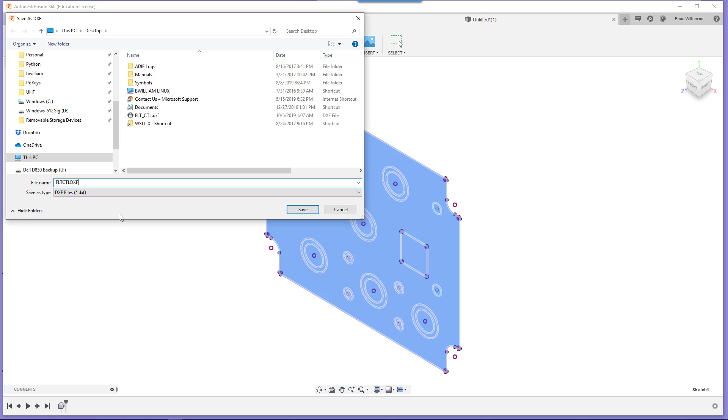However, what we want to do is save this as a DXF file that we're going to import and then start modification. So we go here and save as DXF, and I'm going to call this something like flight control DXF. We're saving it as DXF, and I'm putting this on my desktop.

At this point, we're done here. We can come out of this. We're going to create a sketch. Create sketch, and I want to put it on this plane.

Now that we're looking at it, the idea is we do insert DXF. We have to select the file, and this has basically got everything that we took out of Martin's diagram there into 2 dimensions, and there it is.

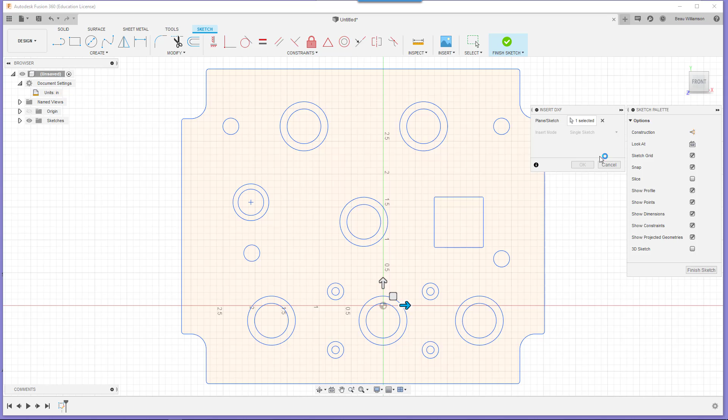And there we go. Okay, now we've got the sketch that's basically imported from the DXF file that we created from Martin's stuff. Now, one of the things that we need to do is create some other things in our sketch here. So we can go in, tell it to edit sketch.

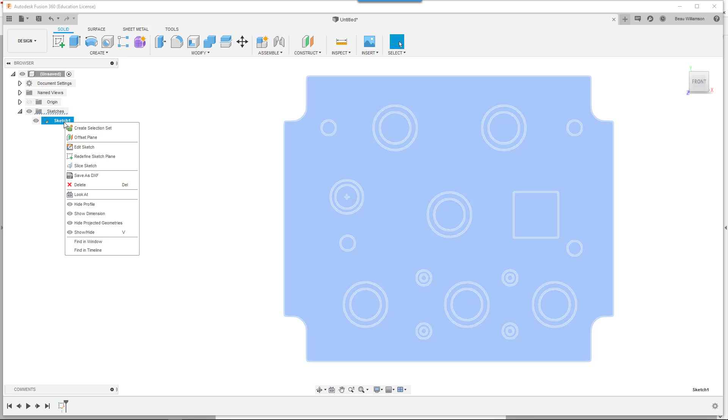So the best way to do that, let's go over here. We're going to do a create, and we're going to draw this out to the right diameter, and that was 0.156 on the diameter. And that's really about all we need on this.

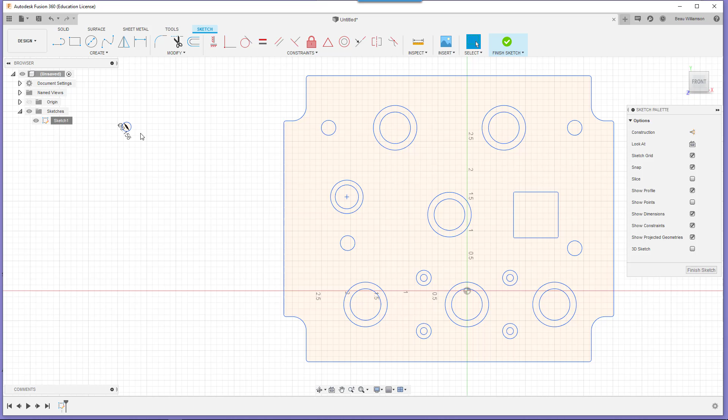We can use this over and over again, and it's going to have a specific depth. Now the other thing, let's go in here, we'll get rid of the 156.

All right, now the next thing is a kind of key-shaped pocket that is used to take the backlight, the LED or the lamp plus the dropping resistor, and put that in the light plate. So it's basically a combination of a couple of circles.

So let's go down in here. Let's do create. Let's create a circle here. This needs to be 0.2, loses the... 0.255. There we have that.

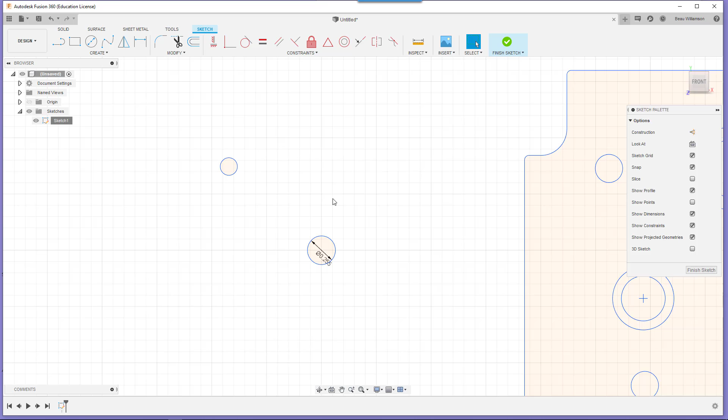Okay, we need another circle, so let's come over here and we'll just tell it it needs to be... wow, my mouse is just going all over the place. So it needs to be 0.1.

There we go. Now the other thing we want to do is tell this and this that their constraint is... whoops, let's do this again. We're going to be vertical from each other, these two items. There we go. Now they're vertical from each other.

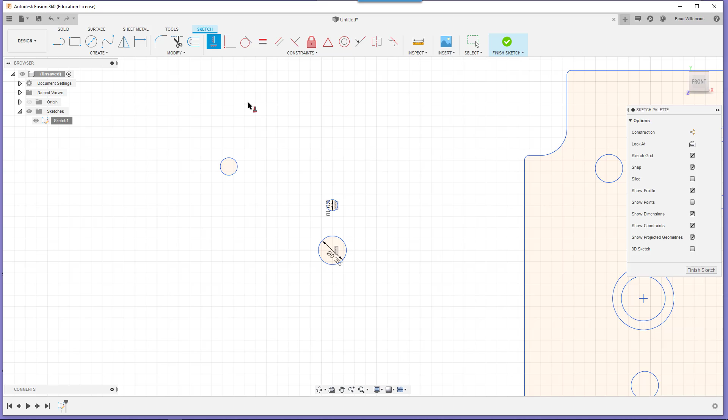The next thing we want to do is a dimension and say the distance between these two is 0.250. And now we need to put a rectangle between these two to get these to be the right size. So that's what we're going to do now.

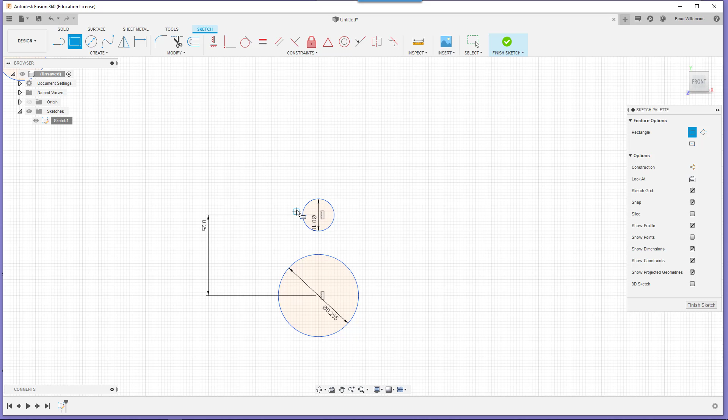So let's go over here and we'll do roughly something like this. It's like that. Okay, we're looking good there. So we need these to all be tangent. So let's see if we can do that.

Select tangent, this particular circle, and there we go, that. And this is also needing to be tangent. And so now we have these.

And then we want this edge here. You notice how it's coming down here. So I believe we want to just bring this down also. Nope.

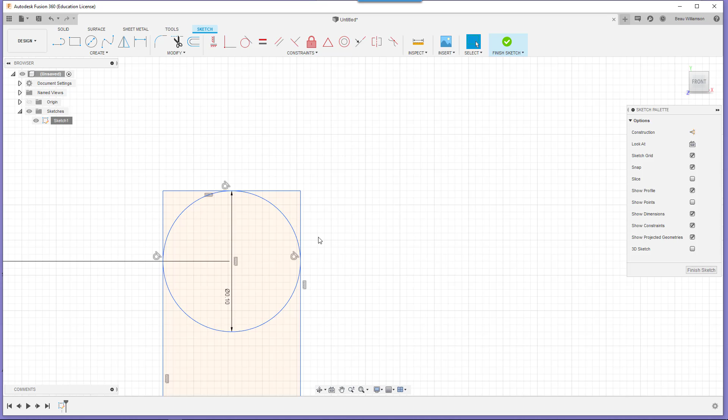We want to bring this down to be... there we go. All right, so now you can see if we scan back out here, we've actually created this. We've got a lot of extra stuff coming down here.

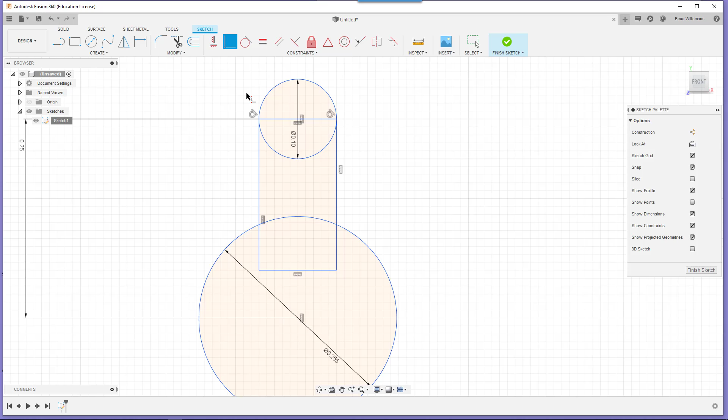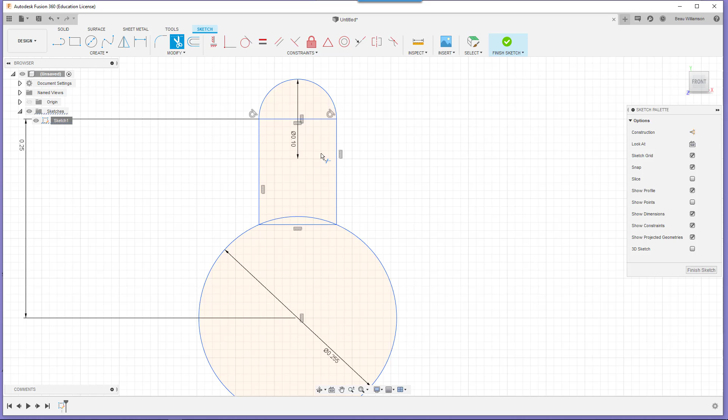Let's do one other. Let's see if we can tell it this needs to be in conjunction with that. So now you can see at this point we have our keyhole here. However, we really don't need all of these elements in here, so we go in and do trim. We don't need that nor this part going across. That's fine. The next thing is this part we don't need. We only need what you see there.

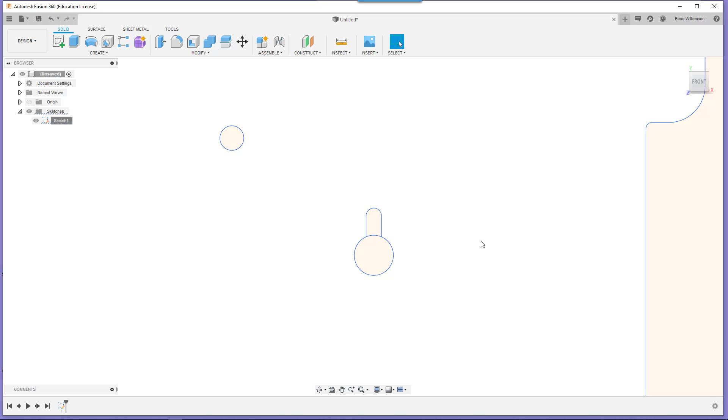So at this point we're going to do finish sketch, and because we're not on top of any of the existing items as you see over here, we're going to come back in this thing and tell it that we want to set the orbit center in here.

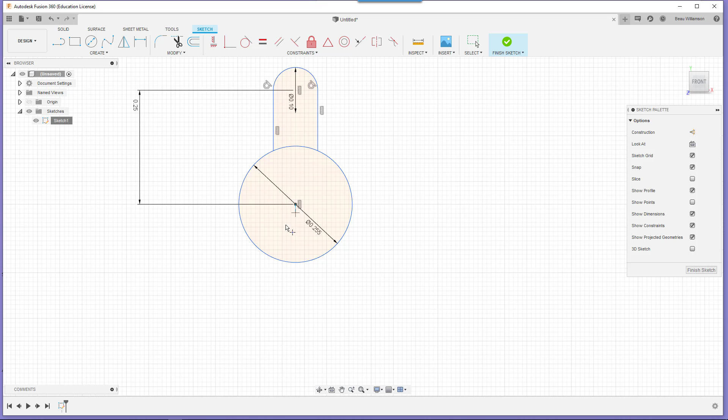And let's do our sketch again of this item. Edit sketch. Let's put a dot right in here. So we're going to go in and create a point right there, and that'll help us do some things. So let's go out of there. All right, now let's go back to where we were going.

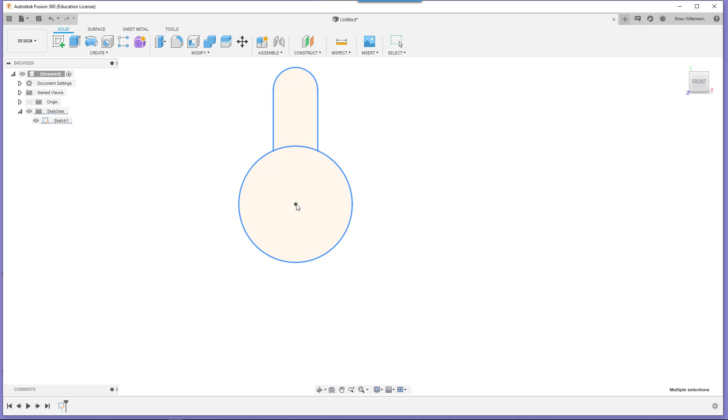We need to go in and tell this thing that the orbit center for this thing is right in here. In order to do that, we have to select all the elements of this and then tell it to set the orbit center on this. It doesn't jump to it for some reason. I'm not sure why, but at least we know where that center is. That's good enough, and now we know where that particular thing is located.

Oh, I know what I have to do. I was out of sketch. That's right, because I was setting the orbit thing. All right, so once again, let's try this again.

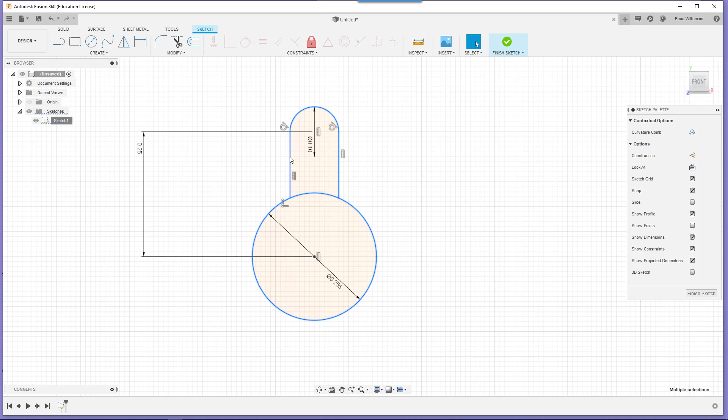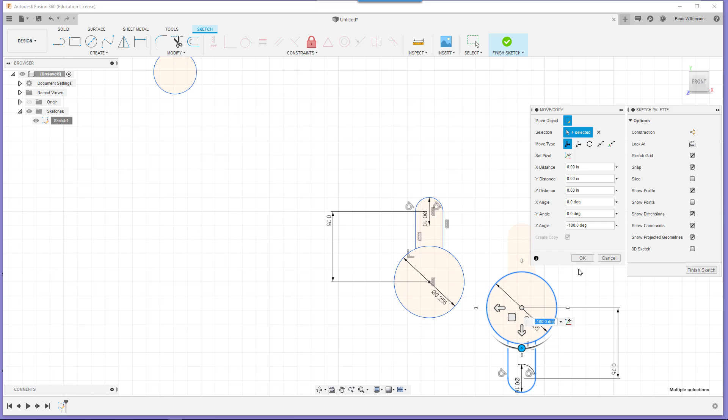And we're going to do a move and copy. You can see there's the rotation spot. Now we can do a copy. For example, we can say, all right, we need another one of these keyhole things, but in this particular case, we want it at 180 degrees from what the other one was. We say OK, and you can see there that we've sketched two of these particular items.

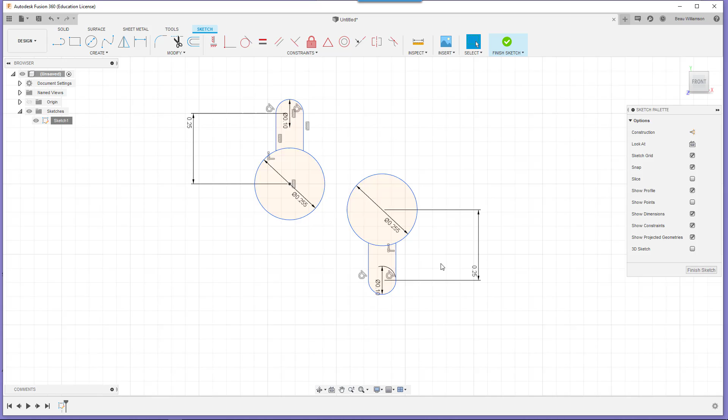One with the north-facing keystroke part. This is where the dropping resistor goes, and here's where the LED goes. And we've got another one that's 180 degrees from that. We can go in and tell it, hey, these things, we don't need to see these in the drawings, like these dimensions here and here. I think this one's got the same thing here.

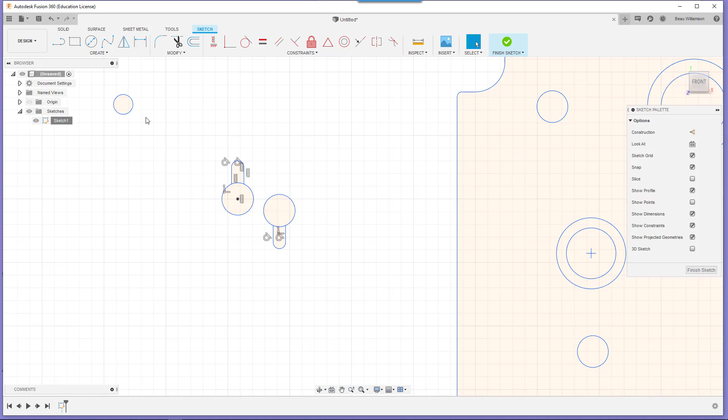And so now we're pretty much back to what we want to drag around. And we can drag these things, these keystrokes and these screw insert items, and put it on our light plate here and start positioning them wherever we need these.

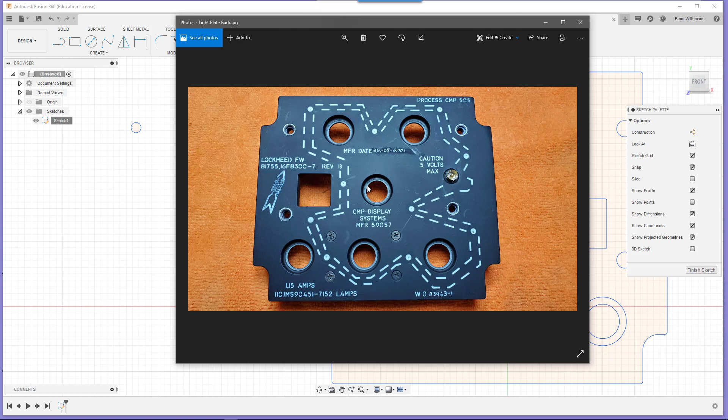And of course I can look down here and I can see this shows me on a real light plate that these dots are roughly where I need to put these keystroke items, and then the screw inserts I'll just put in rows across and down the side and a few other places so that we can screw the printed circuit board into this thing when it's time to do that.

So making good progress here, and that's good for right now.